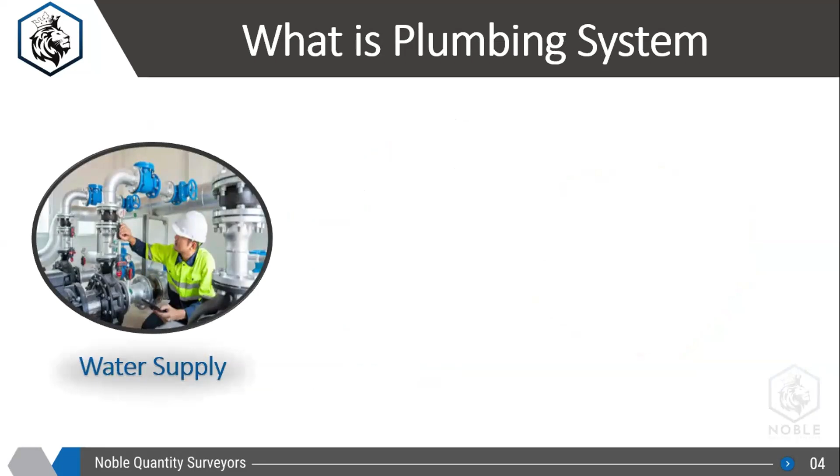The first one is the water supply. There will be one tank on the roof, and it will supply water to each and every flat. So that, in short, is a water supply system.

The second one is the drainage system. Whatever water you are using in the restroom, washroom, or kitchen area, some wastage will be there for the water. So that water has to be disposed off from the building. That is called a drainage system.

The last plumbing system is the firefighting system. There are 3 things: water supply, drainage, and firefighting system. Firefighting system, we all know, is part of a sprinkler system. So if there is any fire inside the building, you can overcome that fire. That is called a firefighting system. So the plumbing system is divided into 3 parts: water supply, drainage, and firefighting.

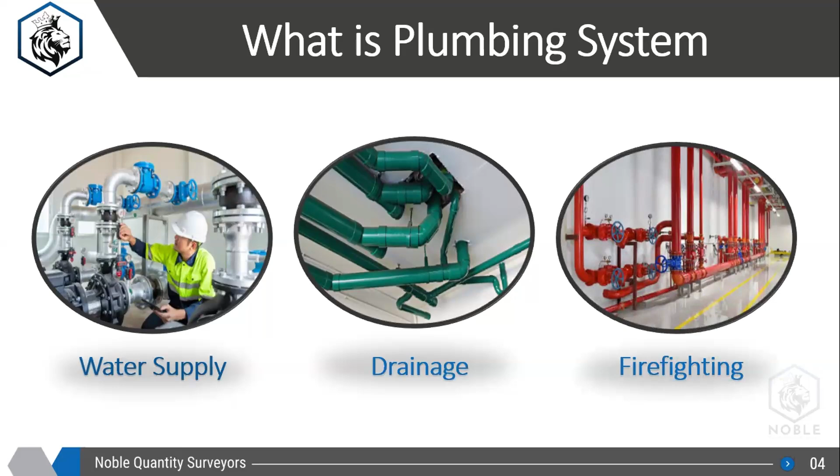Let's start with the water supply works. For supplying water inside each and every flat, there will be so many things: pipes, pumps, water tanks, water heaters, valves, accessories, sanitary ware, so many things. I'll just try to explain with a schematic how, in a bigger picture, the water supply system works inside a building.

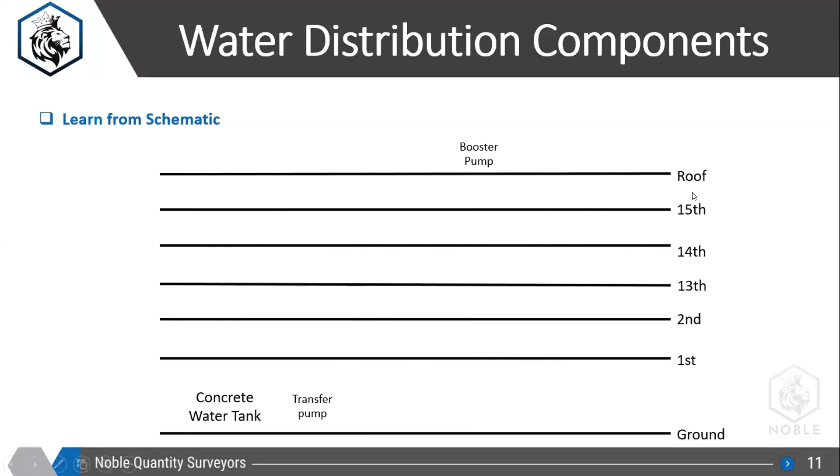I'm taking an example for a high-rise building. If there is a residential building with G+20 floors or G+40 floors, I'll start first from here, then I'll go to one drawing and try to explain from there. For example, I have one building in front of me, which is 15 floors. So what are the components that will be there for the plumbing works?

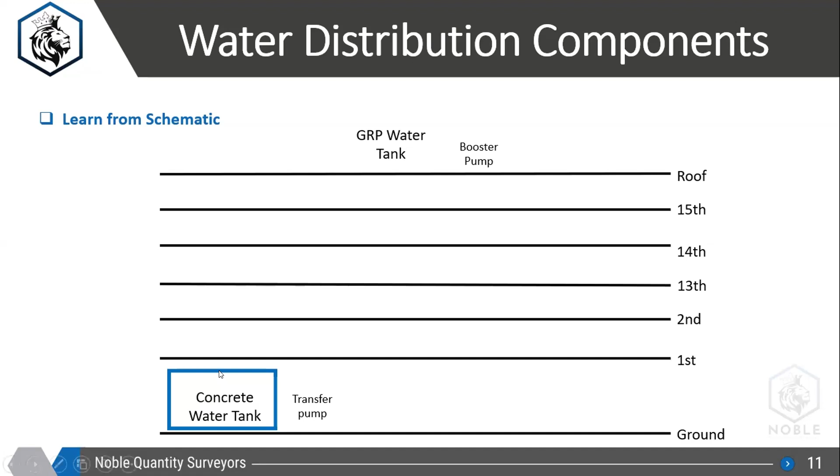The first one is a concrete water tank. Every water supply in a building comes from the government. There will be one centralized government supply for every country, and from there the water comes to every building. So first, the water will be stored inside this concrete tank, which is located at the ground floor.

The second thing will be a transfer pump. Once the water is stored inside this concrete tank, there will be one transfer pump which will supply this water to a secondary tank, which is called a GRP water tank, located on the roof.

The first thing is the government supply. From the government, you get the water, which is stored in the concrete water tank. Then it is transferred through this transfer pump to a GRP water tank. From this GRP water tank, it will supply to each and every floor.

So here one pump comes into action, which is called a booster pump. This is the transfer line. Once this water is filled, it will be supplied to each and every flat. Then you will have one booster pump. Booster pump is used to boost the water to the top 3 floors. And then after, the gravity line is used for remaining floors.

What this means is, when this GRP water tank is supplying water to each and every flat - this is a G plus 15 plus roof building, so the tank is located on the roof - once someone living on the 15th floor, he will not have enough pressure of the water. Even for the 14th floor also, you will not get that particular pressure.

So for the tenants living on the 15th floor, we are using one booster pump. So the water supply for the top 3 floors, the 13th, 14th, and 15th, it will be a boosted line, to increase the pressure of the water. But after the 13th floor, once the water reaches the 12th floor, it will have enough pressure.

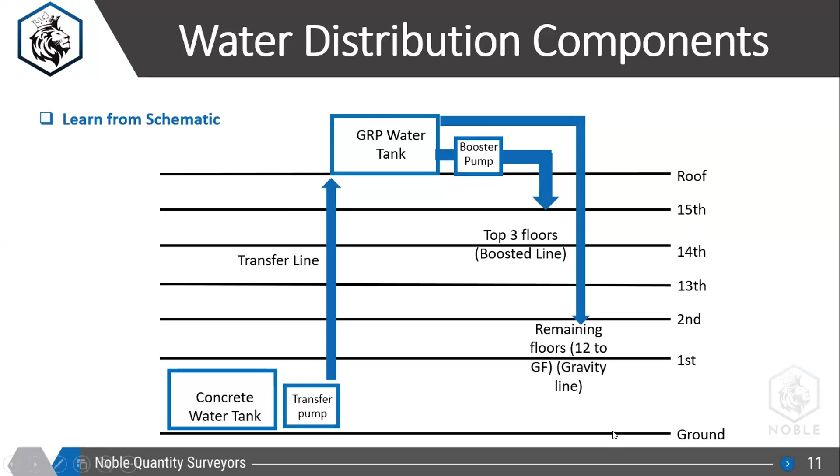In front of you, I'll just open one drawing for one of our projects, so it will be easy for everyone to understand. So what is happening over here? Let me explain to you first.

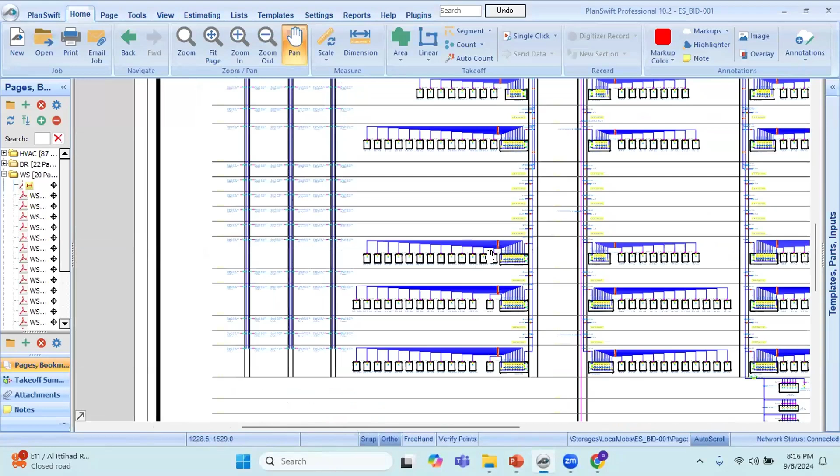This is a building which is 21 plus roof. So this building will have 21 floors, G plus 21. So I'll just zoom out here and go to the ground floor. I'll zoom in on this part.

This is the water supply which is coming from the government - DEWA incoming water line. DEWA is Dubai Electricity and Water Authority. I'm working in Dubai, so here DEWA is the one, this is the government who is supplying the water for each and every building. And this is the plot limit in front of you. Please keep yourself muted, if you have any questions I'll take it at the end.

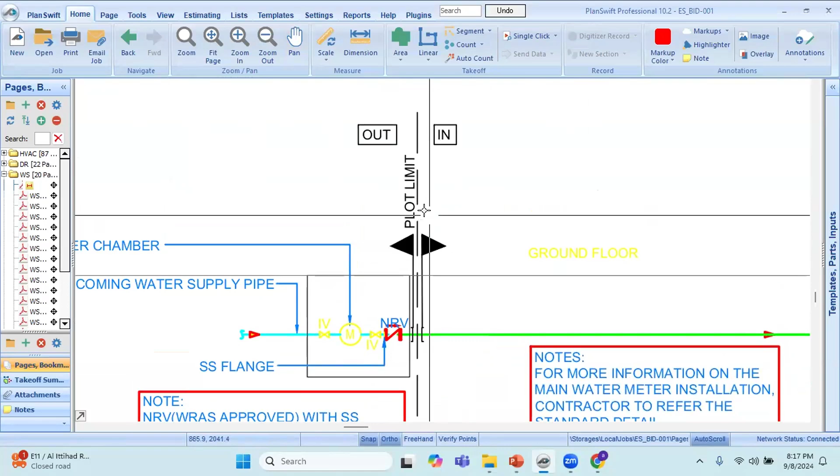So let me explain first. This is the plot limit. From here we need to connect this line. This green color you can see on your screen is the DEWA incoming water supply line going to this particular tank, which is our concrete tank, which you can see over here. This is the tank, this is the concrete tank.

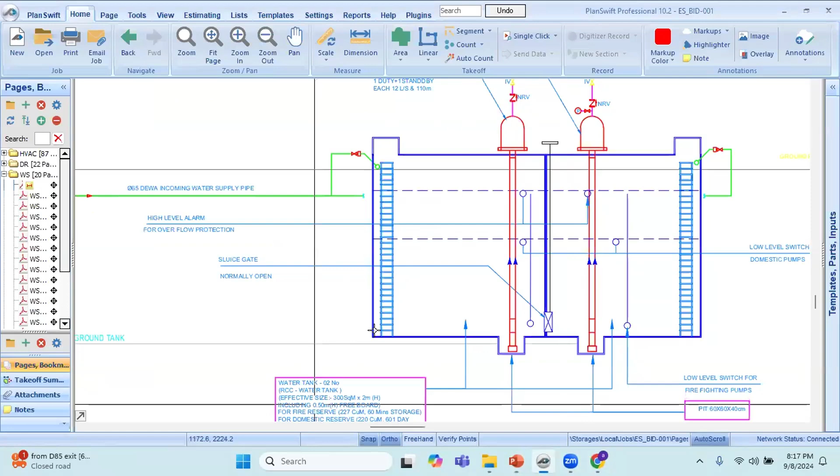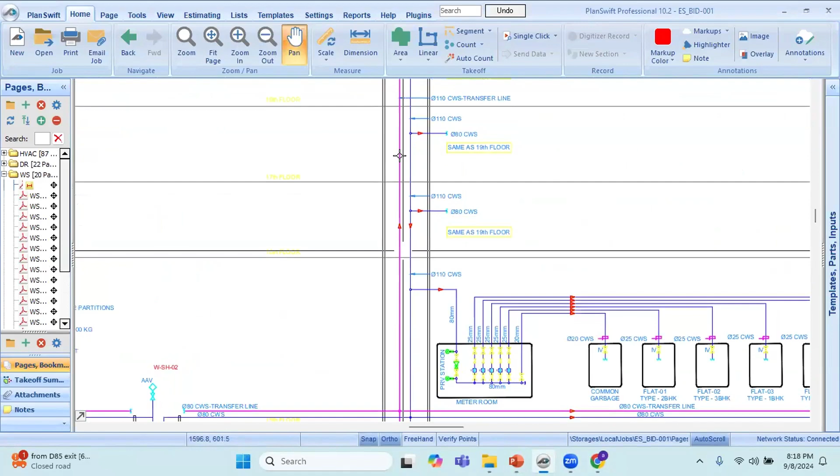Through this concrete tank, there will be a transfer pump - CWTP, cold water transfer pump. These are vertical turbine pumps which will transfer this cold water through the supply transfer line. This pink color you can see on your screen will go till the roof. You can see over here, the 110 cold water transfer line. So this will go to the top. If you follow this, it will go to this GRP water tank.

So you can see over here, GRP roof domestic water tank, 2 partitions. So there will be 2 partitions, and in between there will be 1 partition wall for this tank. And it is 50 meter cube, the total capacity of this tank.

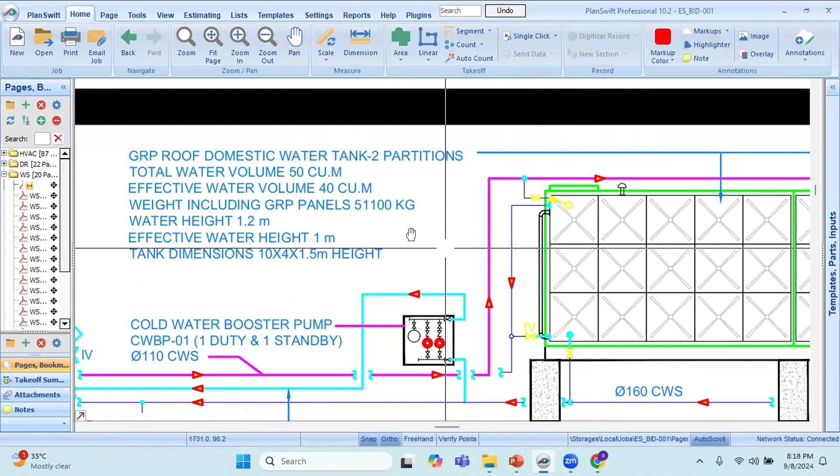So over here, once the water is filled through this line, there will be 2 lines. One line is coming out from here, which is the cold water supply line, going here - this is the line. And the second one is the cold water boosted line, which is connected through here, through this booster pump. This is the cold water booster pump, 1 duty, 1 standby.

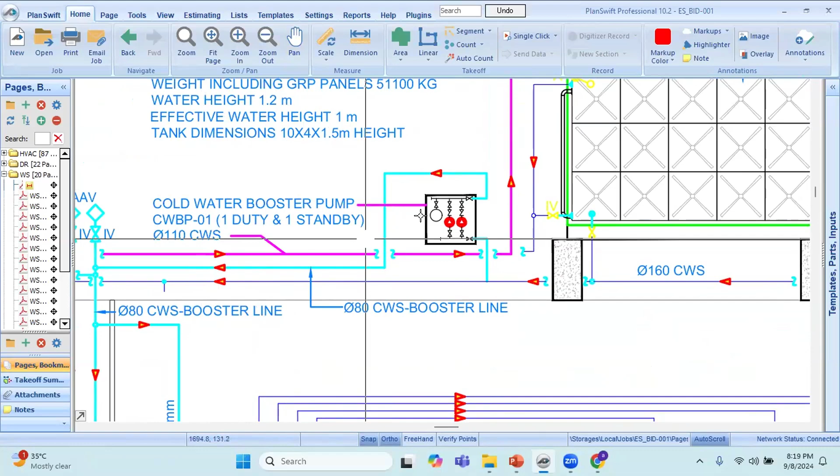A consultant will always design a pump system with one duty and one standby. One pump will always be in working condition, while the other one will be standby and not under operation.

If there is any maintenance required in one pump, or if any pump gets damaged, the flow will be transferred to the other pump while the first one goes under repair. This is why water distribution should not be interrupted - there should always be continuous distribution of water. That's why the consultant always puts one duty and one standby pump. If there is any problem or maintenance in one pump, the water will be transferred to the other pump. This is the concept behind it.

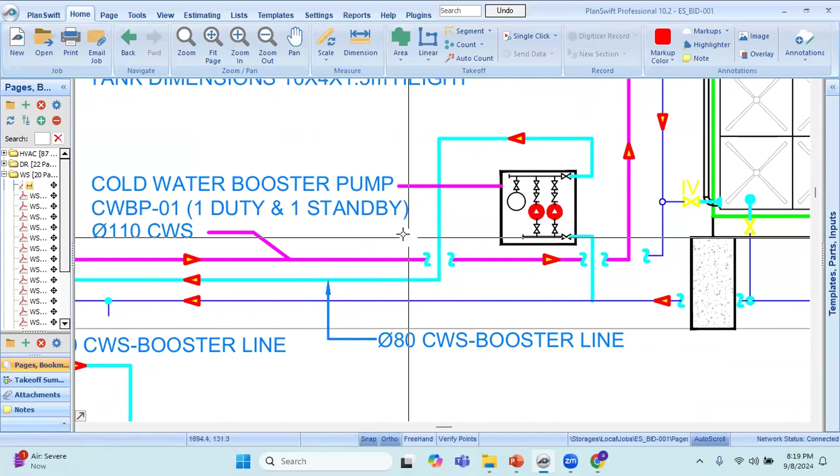There are so many accessories associated with this, like isolation valves, NRV, and there will be one expansion tank and all. Everything associated with this pump I have already explained in detail in my course.

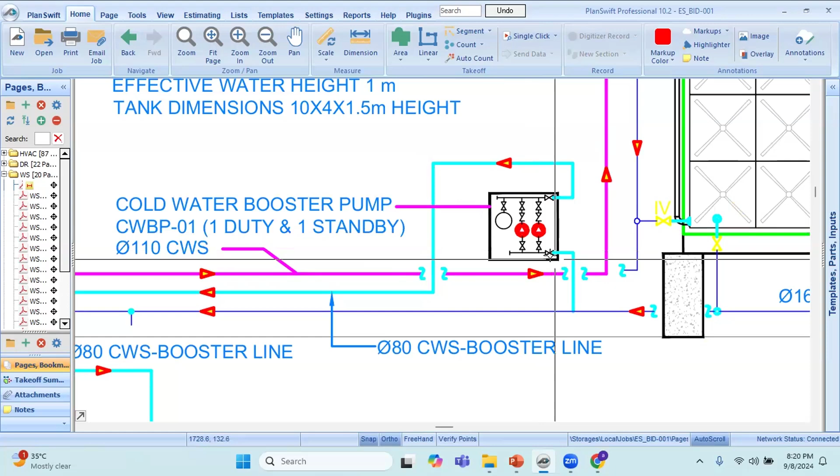From this boosted line, you can see this green color line, it will go to the 21st floor. You can see over here this is the transfer line, and this is the main riser where you can see three pipes. I already explained there will be three lines - one transfer, one booster, one gravity line. You can see the same thing in the drawing, three lines.

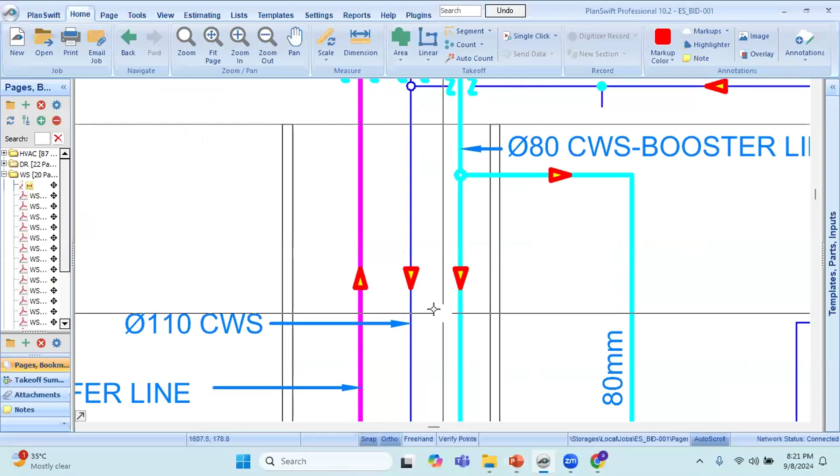One is the transfer line, which is transferring the water. The other two lines - one is the boosted line, written as Ø80 CWS booster line. This green color is the boosted line, which is supplying water to the top three floors.

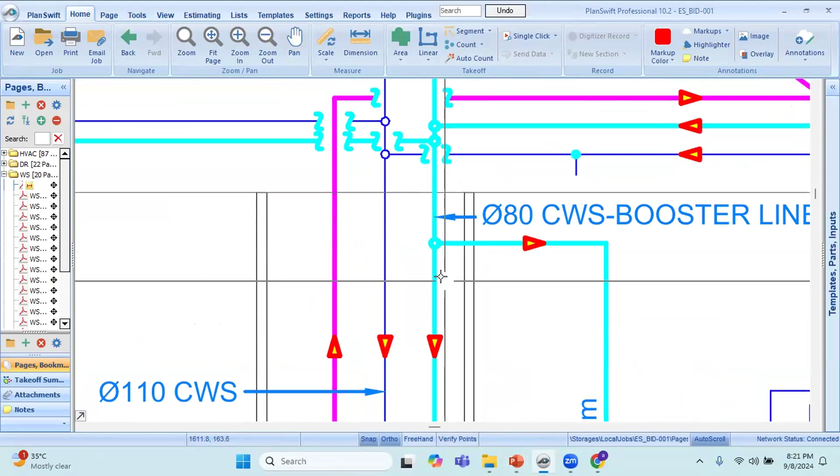Just look into these two lines, this blue color and the green color line. You can see here this 21st floor is supplying water from this line. If you go down, the same thing you see at this floor - the water is coming from this green color line. Still this gravity line remains the same. Again on the 19th floor, the water is coming from this green line, still the same. If you go down again to the 18th floor, the water is supplying through this boosted line.

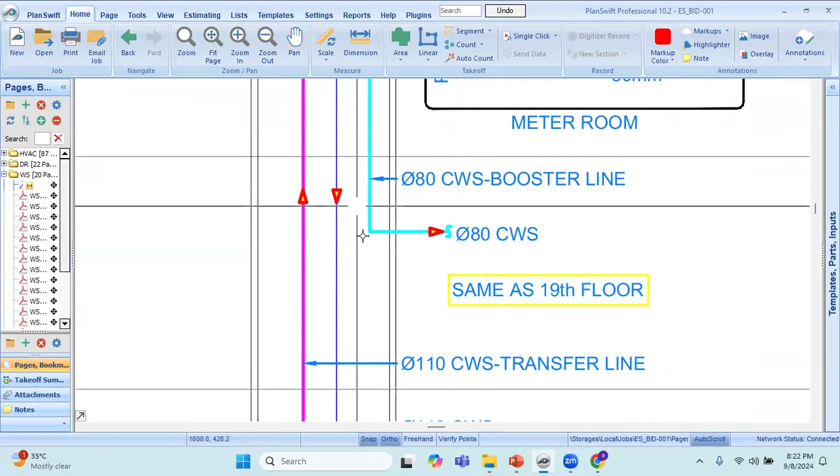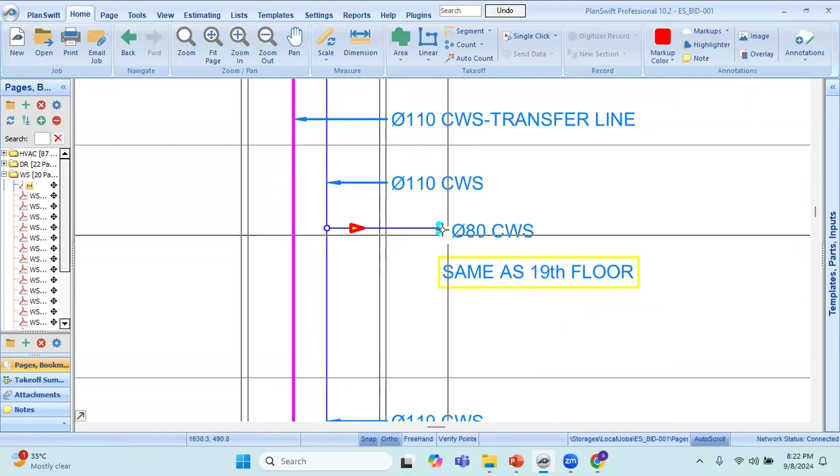And here the boosted line is finished. So for the first four floors, water is supplied through the boosted line. Going down from here, the water supply starts from the gravity line. So first four floors it's a boosted line, and here the boosted line ends. The remaining floors, after this point on the 17th floor, the pressure of the water will be enough to have a particular pressure in each and every toilet. So from here the gravity line starts supplying water for every floor.

Going down, every floor will have the gravity line. This is the PRV stations and all, so these are all the gravity line. After this, there will not be any boosted line - the boosted line is only for the first four floors, then after that it's all gravity line. So this is an example in front of you of the schematic for the water distribution system.

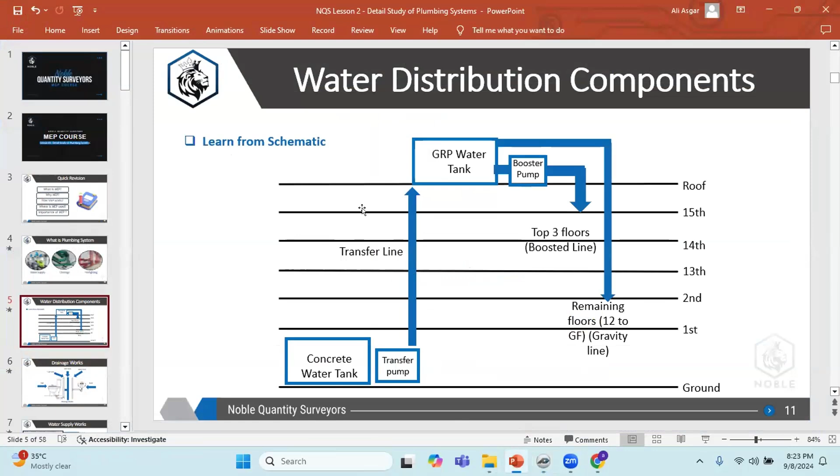The WC pipe cannot be connected with the main waste line. It has to be disposed through a separate line, and a wash basin or kitchen sink or bathtub has to be separated through some other line. So there will be three lines. The first one is the soil stack, which is the soil line connected to toilets only, and it should not be connected with any other waste. The second line is the waste stack, connected to the wash basin, bathtub, or any sanitary waste - these two lines should not be connected with each other. The last line will be the vent stack.

Once you connect this soil pipe to the WC, there will be some bad smell or bad odor, so this has to be moved out from the building. At your home also, you can see on top there will be one extended pipe with a cover on it. That is connected to all your soil waste pipe, so whatever smell is there in the system has to be moved out, terminated to the roof. There will be a vent cap or cover so that any rain water should not go inside.

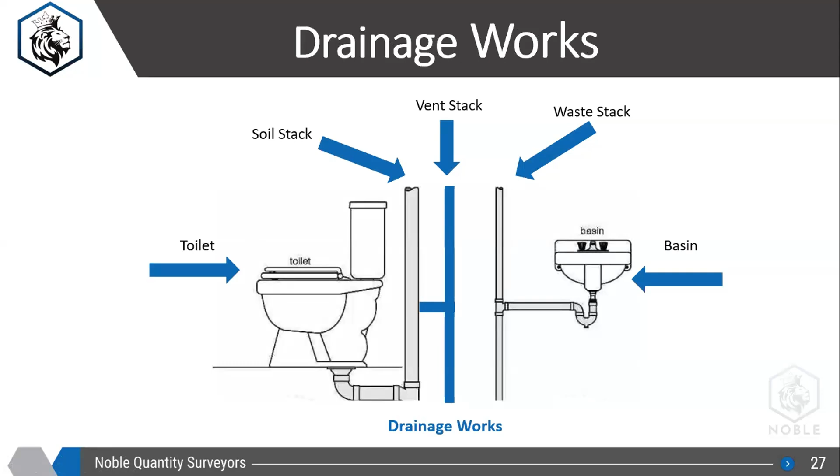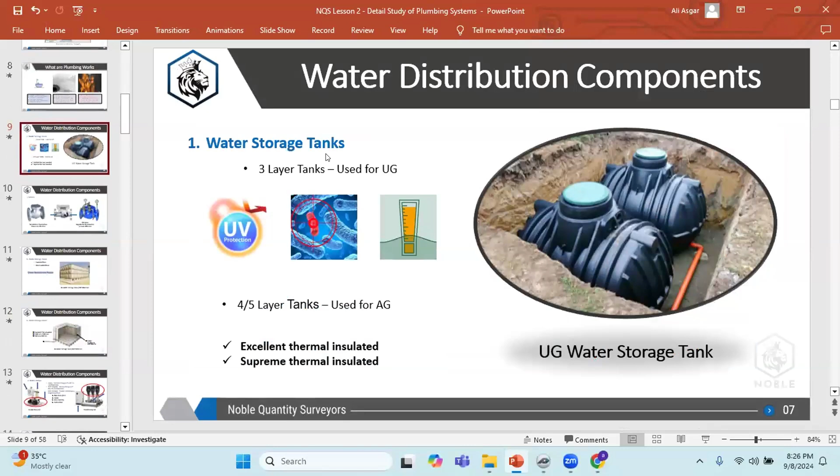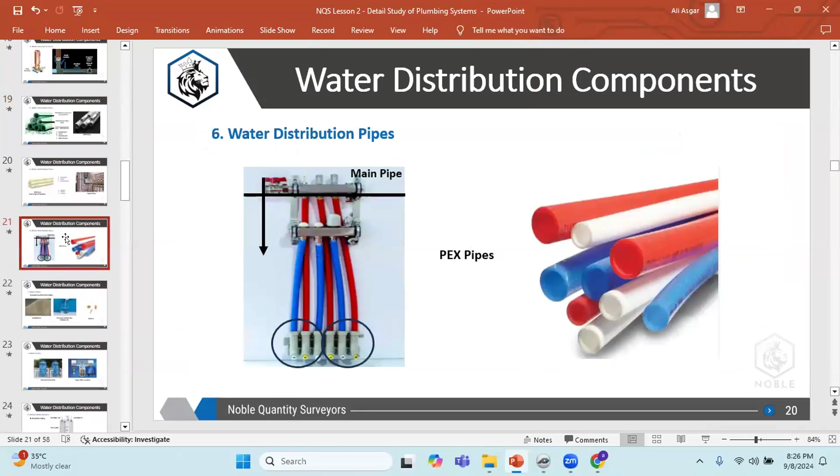This is how a drainage system works. Then after, I have so many things which I've already explained in my course - the water supply, distribution tanks, types of water storage tanks, types of pumps, which is the cheaper one, which is the expensive one, what materials and types of these are. All this everything you can see on your screen, I'm not hiding anything - I have explained it all in my course.

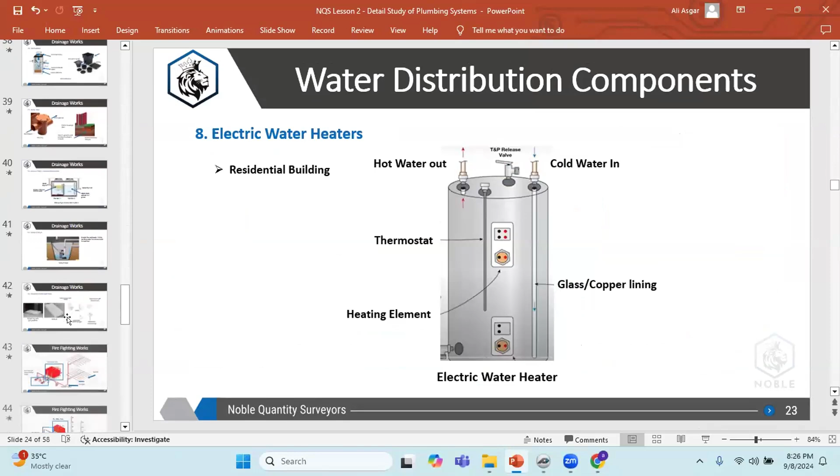Now we will jump into firefighting works. What are the firefighting works associated for a building? I'll start with the schematic for the firefighting works, again taking an example for G+15 floor.

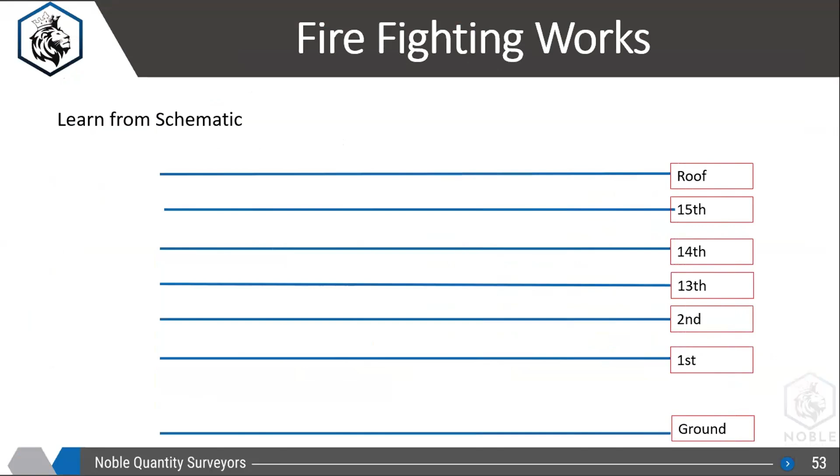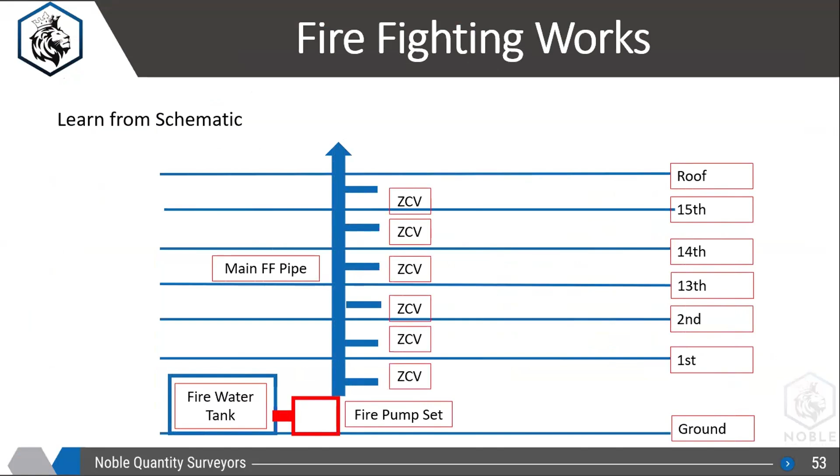The concrete tank will be divided into two parts - one part supplying water for potable use, and the other part used for firefighting works. There will be one fire pump associated. This is the main pipe, and every pipe will be connected to one sprinkler through one ZCV - these are the sprinklers we see all over the building, whether inside the corridor or inside the flats. This is how the system works for firefighting.

Then there will be one more separate system in case of any fire inside the building - a breaching inlet where the fire department will come with their tanks. Once the water is finished, firefighters connect their pipes here because they have a lot of external tanks, and they supply water inside the building through the breaching inlet. These are the FHC, fire hose cabinet, seen all over the building, inside corridors and basements. There will be one reel, 60 meters, in the box with a nozzle, so wherever the fire is, you can spread water on it and overcome the fire. This is how a complete firefighting system works.

So what are the types of pipes to be used? What are the components associated with the ZCV? What is ZCV? What are the different types of sprinklers used inside the building? What is FHC, and what components does it have? What is breaching inlet? What are the firefighting tanks? What kind of fire pump set is used inside the building - because once fire occurs inside the building, the electricity will be cut off, so there should be a combination of pumps used in the firefighting system: diesel, electrical, jockey. All this I have already explained in detail in my course.